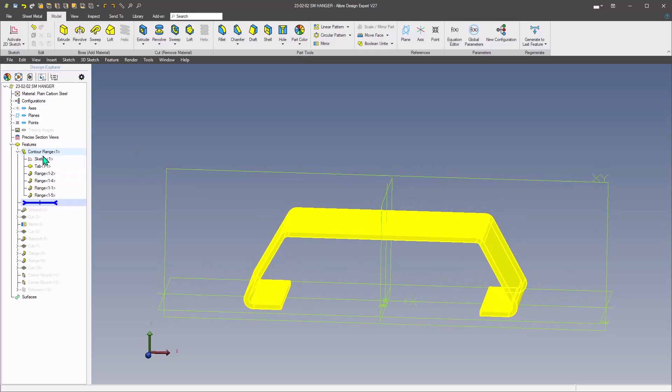Okay, so here's the part that I ended up with. Let me just roll this back to the beginning, and we'll kick it off with the first step that I did, was create a sketch so that I ended up with the requisite 170 millimeters along the top at the apex of this bend.

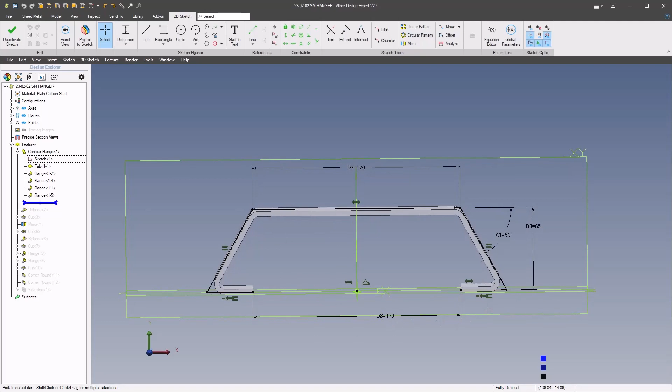Then I put in a 60-degree flange sketch on each side, and I made those two equal. And then the bottom flanges, I made them coincident with the origin and 170 millimeters between, and put in equal constraints between those two. And I've got a dimension at 65 millimeters high, which is the required 65 millimeters height that we need here.

And then with that, I created a contour flange, and I extruded that to the total width of 112.52.

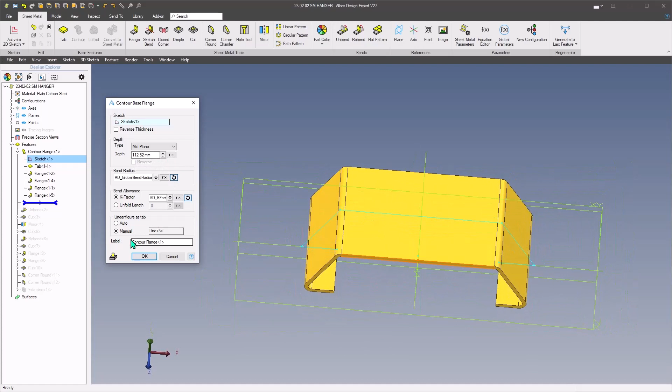Now, one thing I'll point out here is that when you're using the contour base flange, the linear figure as tab is usually set to auto, and I usually leave it set there, but when you go to get the flat pattern, it can give you some odd results.

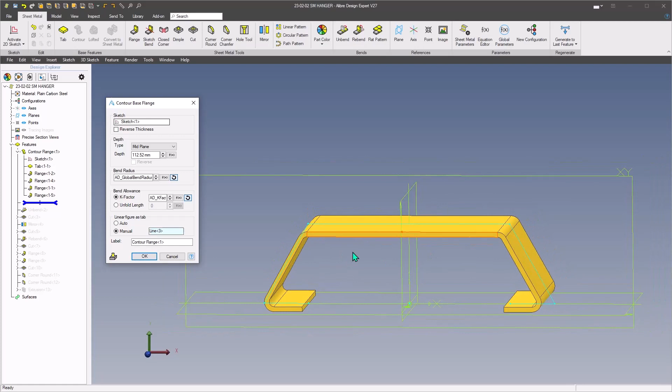So what you want to do is select manual, click in this box, and then select a horizontal line, and that will give you a part that will flatten parallel to the XY plane, and it won't be skewed off at some weird angle. We'll cover that later in the video.

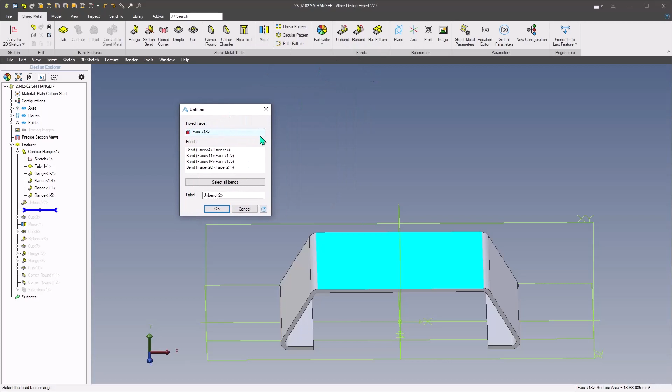So with that said, I've got this basic shape. First thing I did is I went in and did an unbend, and basically you go to unbend, and I just click on my top face here as the fixed face, and then hit select all bends so that everything would unfold. And the next step was putting in this sketch so that I could get the 26-degree cut or slope on the end faces.

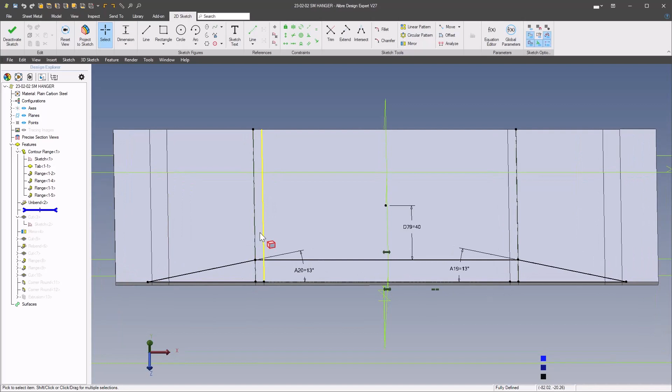So my sketch goes from this tangent, this edge of the bend line to this line here. Those are going to be the tangent points of the bend to the side faces. And then I dimension that 40 millimeters off the center, or off the origin.

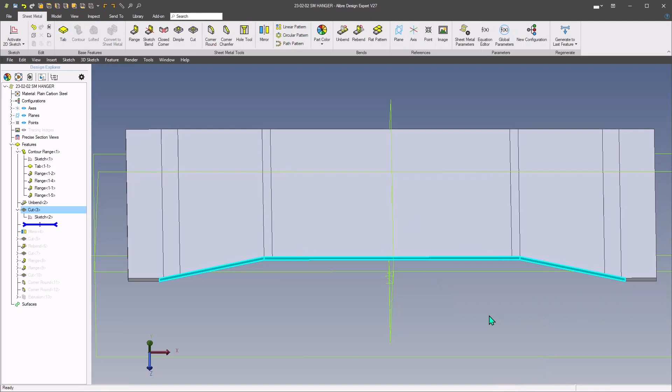And then at 13 degrees, I just extended that out to where it came to the edge, and then put a line across there. So now that notch cuts off that part, and mirror it. Now we end up with an 80 millimeter wide tab in the middle, and then 26 degrees on their side faces. So we measure between our side faces.

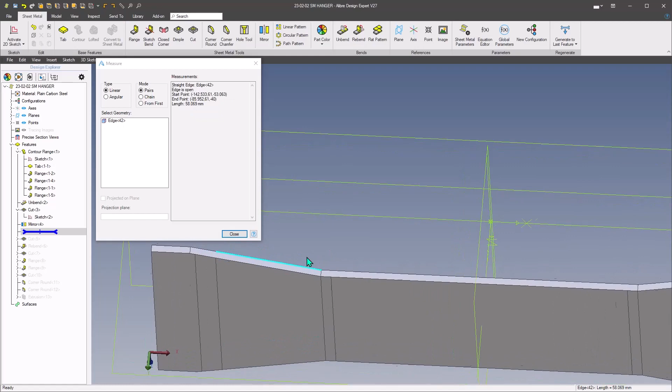If I can get the face here and the face here, go to angular, we've got 26 degrees, which is the required angle that he needs there.

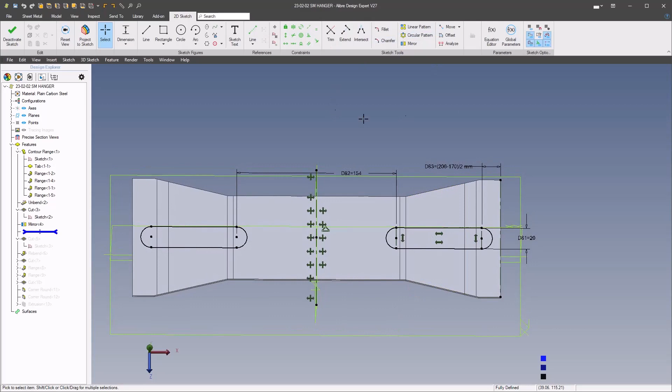Then we go to put in our cut, and this is where I know on his video he was saying this was kind of tricky, but anyone that understands the reason why they put unbend and rebend in sheet metal tools understands how to use this.

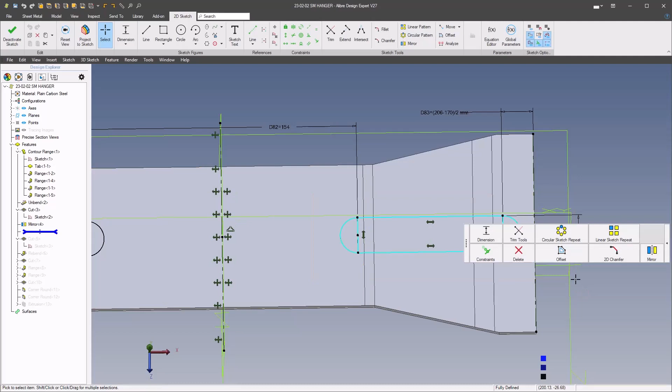So what I did is I created this as a rectangle on this side, and I converted these two end lines to reference figures, and then I sketched in some center point arcs to complete this off as a full dimension arc. Then just drew a rectangle around it, and I mirrored that to the opposite side, and then I applied my 154 dimension between those two.

So I've got 154 on the top surface. To get the right dimension on the bottom...

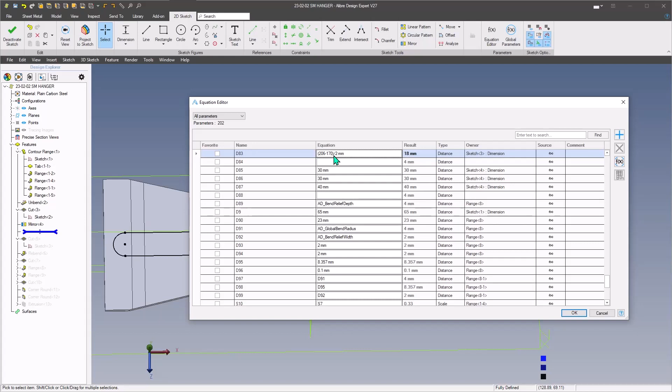What I did is I open up my equation editor, and then I put in open parentheses, my 206 is the dimension that I need, and I subtracted the 170 dimension, which is the dimension between the ends of the flanges, close parentheses, and divide that by 2, and it gives me 18 millimeters, which is the distance from the center of this radius slot to the edge of that panel.

And then it was a matter of cutting that through.

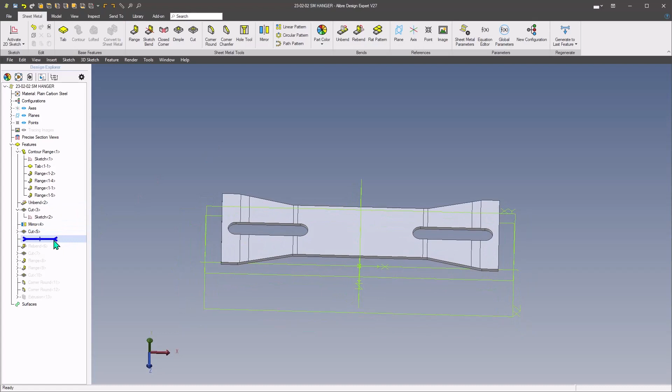The next step is to do a rebend, which is basically just select the rebend tool and click on select all unbent bends, and it folds the part back up again.

And if we measure between these two slots here on the bottom end, we end up with our 206 as the drawing requires.

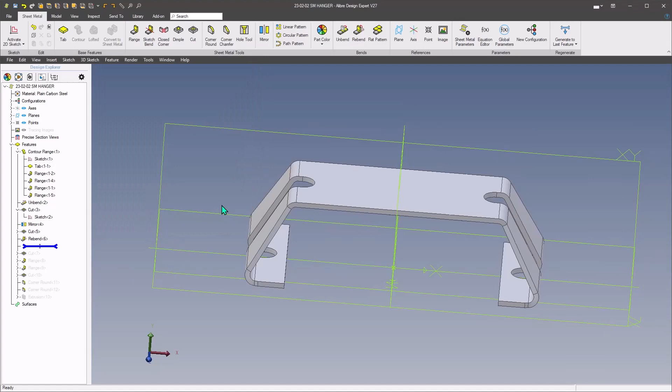Next thing I did was cut these two holes in the top for the top flanges, and again I used a mirrored sketch. I put a 30 millimeter square in here, and then I centered this on the origin using constraints, going to midpoint.

It's like these 2 points and then the origin, thanks to Ex Machina for that tip. And then I mirrored that to the other side, and I was able to dimension 40 millimeters between the two edges, and they stay centered on the part.

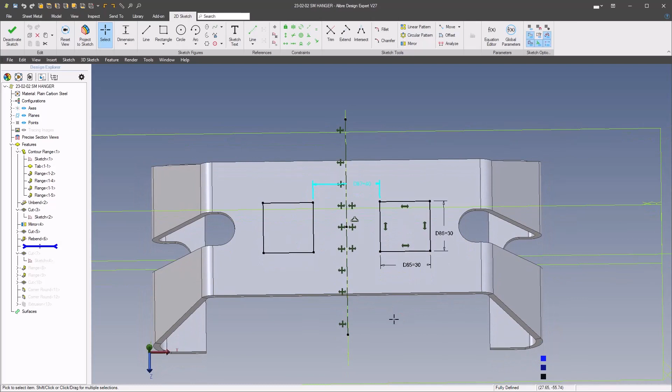And then it's a matter of doing the cut to thickness on there, and then we're done with the holes.

Then for these flanges, basically I selected the two inside edges, set my flange alignment to adjacent, and since the dimension here we're at 65 on the total height, 88 to the top of the flange from the bottom, leaves us a 23 millimeter flange from this top surface.

So using inside dimension, I set it at 23 millimeters, and then on my offsets I put 2 millimeters in each one. That gives me the 2 millimeter gap on each side, and it's set to 90 degrees, and that takes care of that flange.

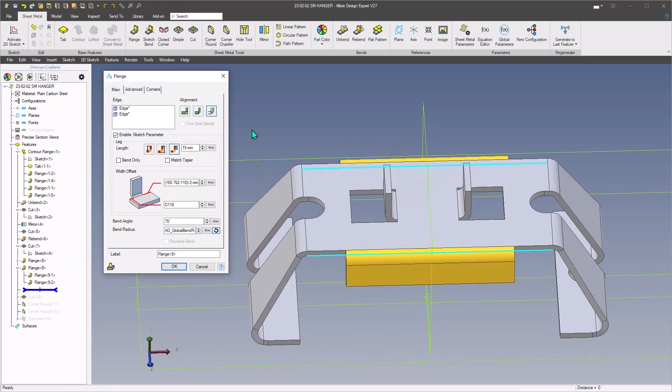Then for these flanges, again, before I let me back up here. Before I put these flanges on, I selected the edge here and got the length at 160.762, because I'm going to use that value to calculate the length of these tabs or flanges.

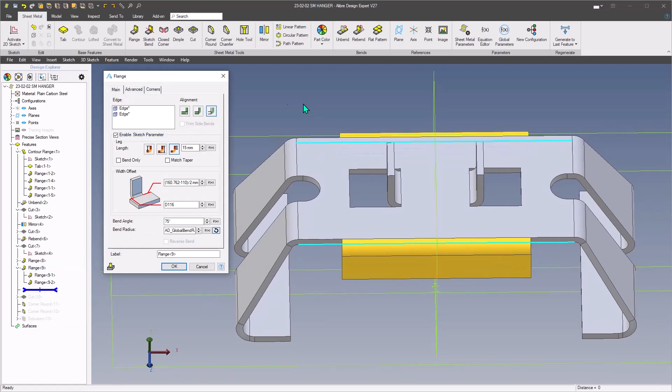So what I did here, again, I'm going to do a bend that's adjacent so that the bend is outside the material.

Now here we're looking for the tab length at 15 millimeters, and for the length offset, again going to the equation editor, I've got my open parentheses and 160.762 minus the 110 flange length, close parentheses, and divide that by 2, gives me the 25.381 offset dimension.

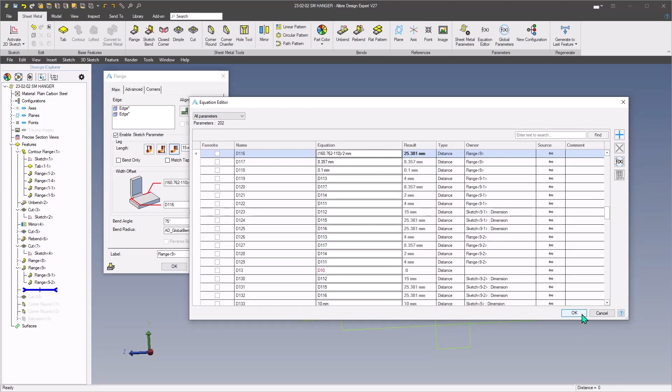Then I made this dimension equal to this one just by keying in its label, D116, into this box, and I've got a flange that's centered on the panel, and that is in fact 110 millimeters long.

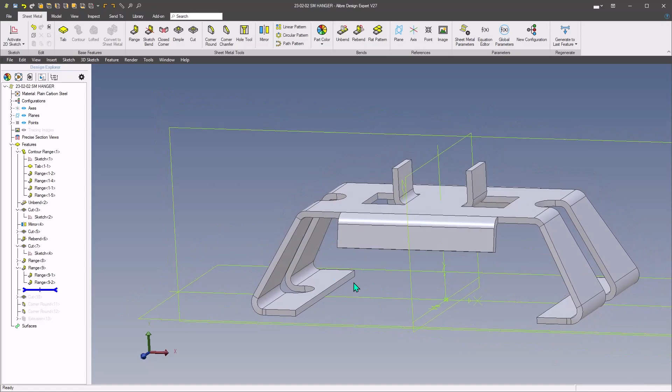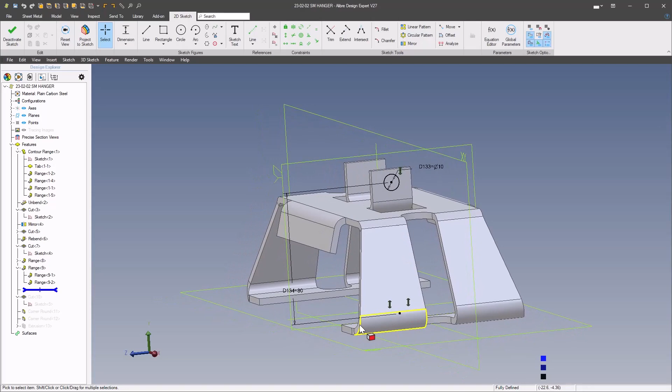The final cut that we did here was a 10 millimeter diameter hole through the top flanges. That's just a 10 millimeter circle drawn on this face with a vertical constraint between its center point and the origin, dimensioned at 80 millimeters off the origin, and cut through all.

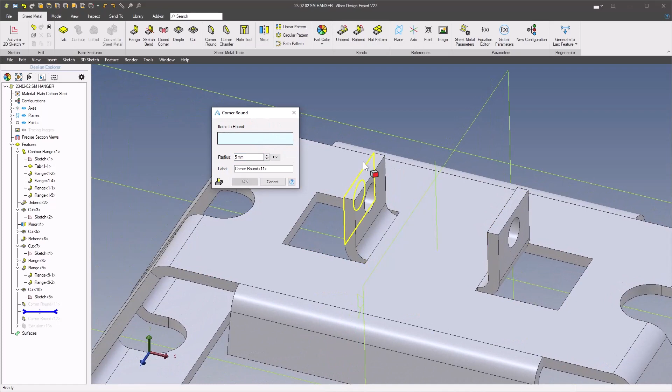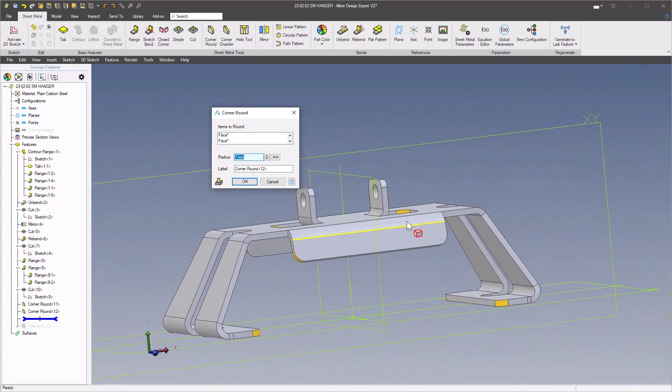Then it's just a matter of throwing in some corner flanges, or corner rounds. Notice it says faces and not edges here, so if you want to select all the edges on this tab, you just grab an edge or a face, and it grabs all those edges and applies a radius to them. On the bottom, again, all the remaining edges get a 7 millimeter radius. So it's a matter of selecting all these different edges to get the radius, and in some cases you can select just the panel itself and it'll radius the corners for you.

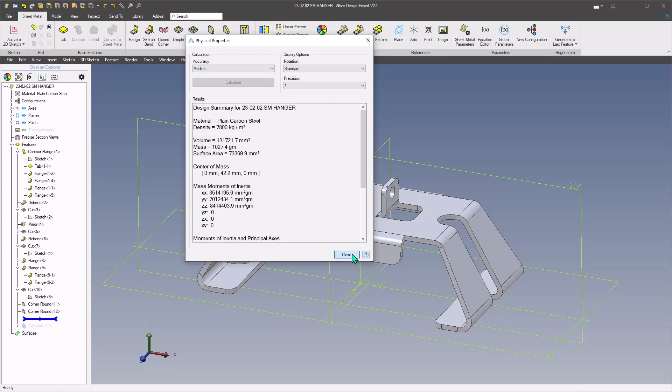So that was kind of the quick and dirty on how this part got made, and I ended up with a total mass of 1027.4, which is 0.6 grams off of his requisite 1028. So we're well within tolerance on here.

So what I want to do is show a couple of things that I noticed differences between the way I created this and the way Tony was showing on his tutorial.

Okay, so let me start a new part here, and I'll just set the sheet metal thickness to 4 millimeters, and we'll make the bend radius equal to thickness, and okay that, and then we'll just create a sketch here on this XY plane. Actually, I'm only going to create half of the part to illustrate the major differences that I found here.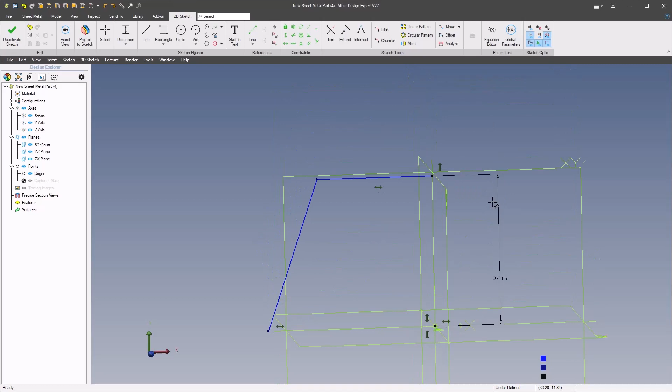So I want a vertical constraint between this endpoint and the origin, and then a horizontal constraint between the origin and the end of this line, and we'll dimension this to 65. This is going to be at an angle between these two at 60, and the length on this line here is 170 divided by 2.

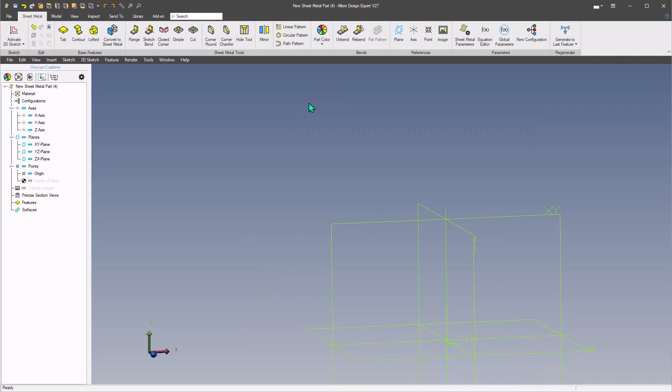Okay, and then we'll select our contour flange tool, and we'll change our depth to mid plane and our width to 80 millimeters, and then we want to reverse the thickness because we want the sketch line to be on the outside, so we capture the 65 millimeter height and the length to this intersection or this apex.

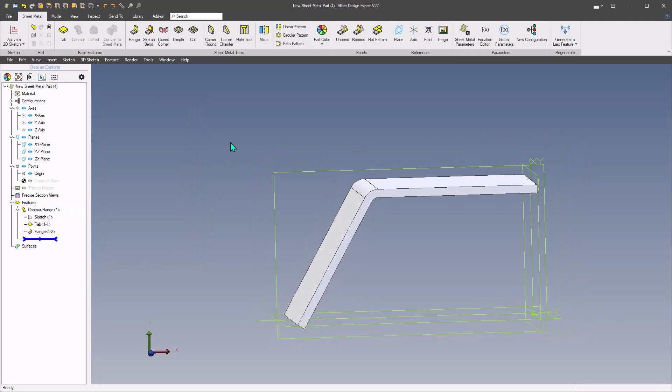Okay, so now let me okay this, and here's one thing that I want to point out. Since I started this sketch with a horizontal line, and it says the figure tab is auto, if I switch to manual, it's saying that it's going to pick up line 1, which is this horizontal line, to create the flat pattern. So when you do a flat pattern, it's just going to align that nicely with the XY plane.

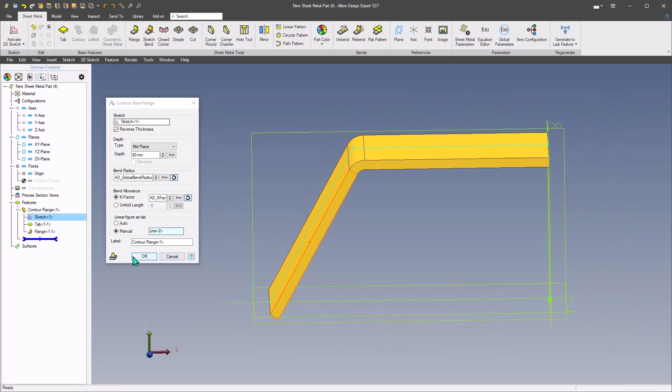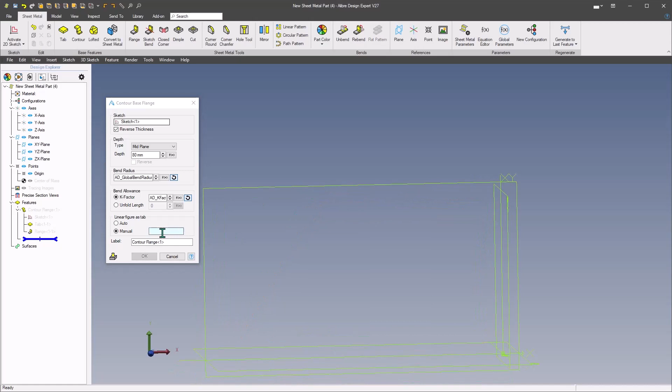If I had this pick this other line here, it's line 2, and go to flat pattern, see how it's skewed now because it's got this line at an angle, and it kind of just throws it up there. I don't know, it seems arbitrary, but I imagine there's some reason for it. So let me switch this back to line 1, contour flange, edit, select line 1, okay, and flat pattern looks good.

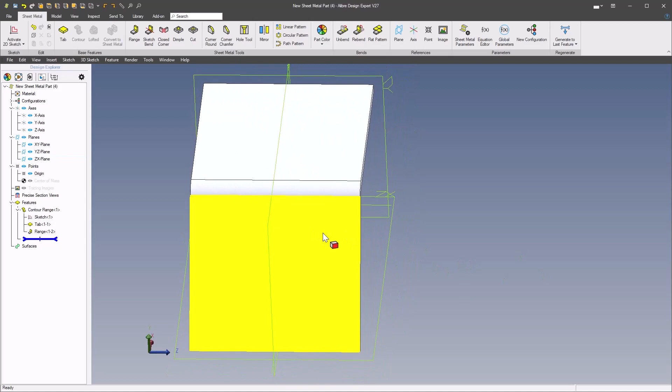So now here we have our width at 80 millimeters, and what Tony was saying in his tutorial, he was actually creating a sketch on this panel, and we'll just convert this to geometry, and then we'll come in here and draw a couple of lines. Didn't get my lines here, maintain, and select OK.

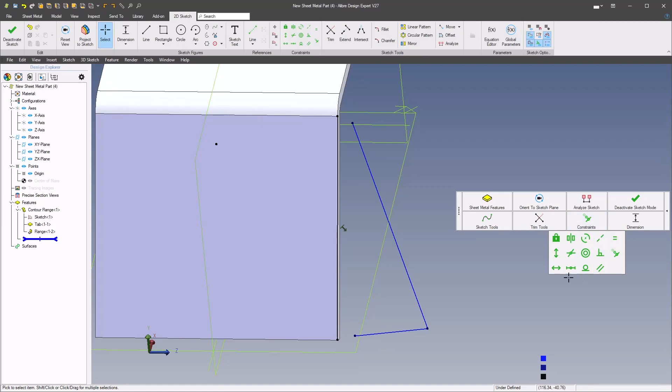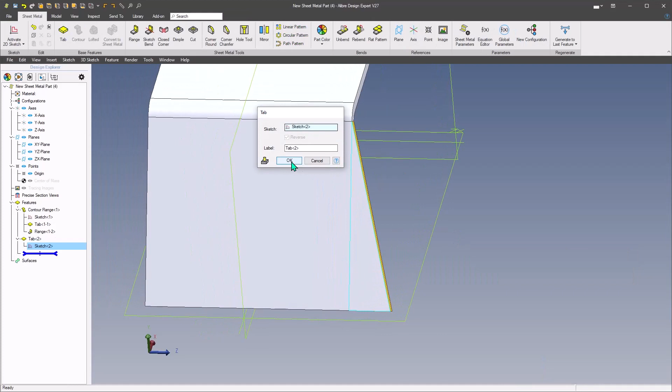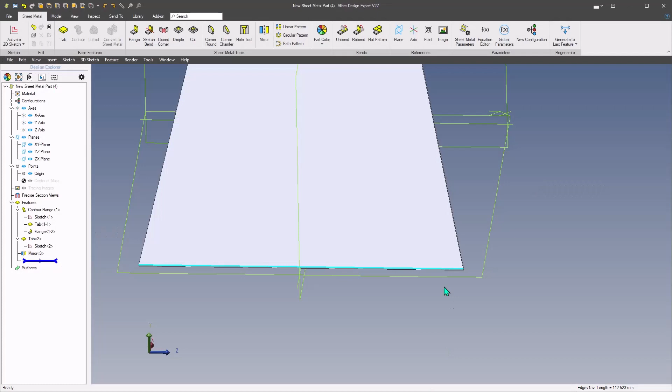Now we'll have a coincident from this point to this point, and from this point to that point. We'll make this horizontal, and this will dimension at 13 degrees, and create a tab on there, and then we'll mirror this tab about the center plane. Here we select our edge there, and we get a length of 112.523, which is what he was showing on his drawing at 112.52 as the width on that. So I'm assuming that his method gave him that length, and that's what he stuck with on the model.

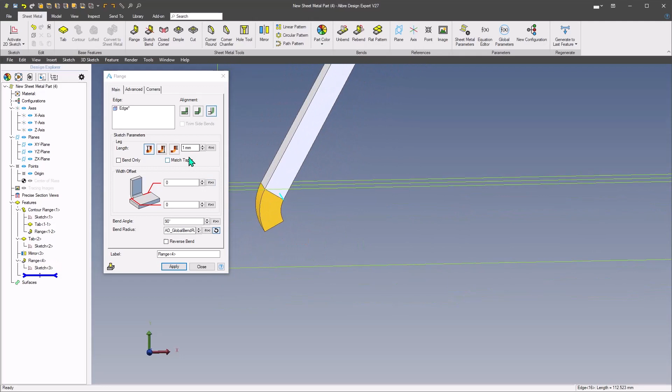So now we need to add a flange, return flange down here. If we come up here and select our edge flange, and grab this line here, I'm not sure what the length is going to be, but we'll say 45, and then we need an angle, change that to 120. But now we need this panel, this flange, to be up here on the line with the origin, so we need to change the position of the alignment.

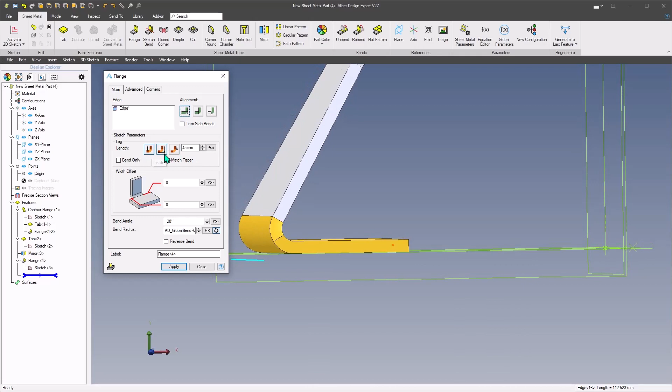So if we change this to outside, that's still not there. If we go to inside, then we get it lined up with the origin. The leg length really doesn't matter, because I'm going to trim this back to the 85 from the middle, so that it lines up with the 170 divided by 2 on the top there. So we'll apply this and close.

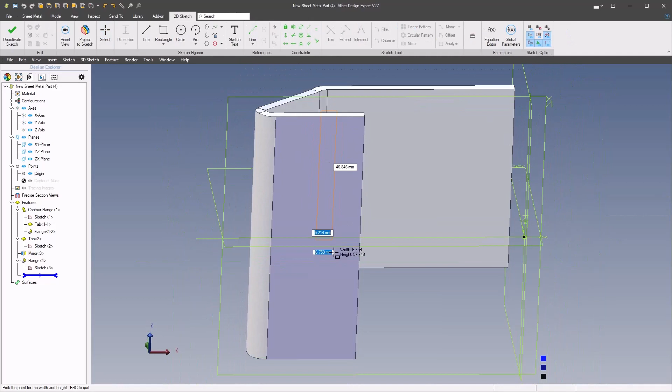On here we'll activate a sketch, do a rectangle, and we'll just throw a quick dimension on here, 170 divided by 2, and we'll do a cut to thickness. So now we have that length, and we have our height from this panel to this panel. We have our delta Y at 65 millimeters, which is what we wanted.

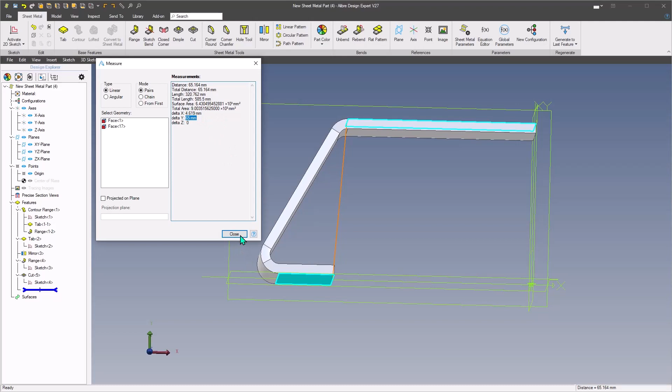Now here's the kicker, is that we measure the length of this line, we're at 108.698, or round it off 108.7, which when you look at his drawing, 112.52 plus or minus 1, so the shortest we can be is 111.52. So using his method is going to put this out of tolerance for length.

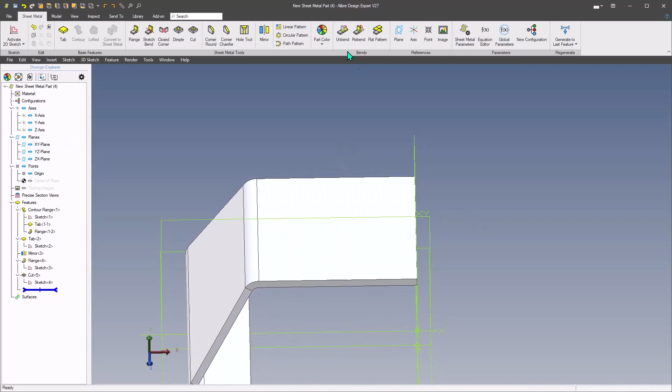The other thing I wanted to show is that his part here, he's got 30 millimeter rectangle or hole squares cut out here, and if we come in here and try to use our sketch bend tool, we're going to have a problem. So if we do a sketch here, say 30 by 30, and then we'll use our midpoint constraints between point and points of those lines and the origin to center that, and then we'll just dimension this to 20.

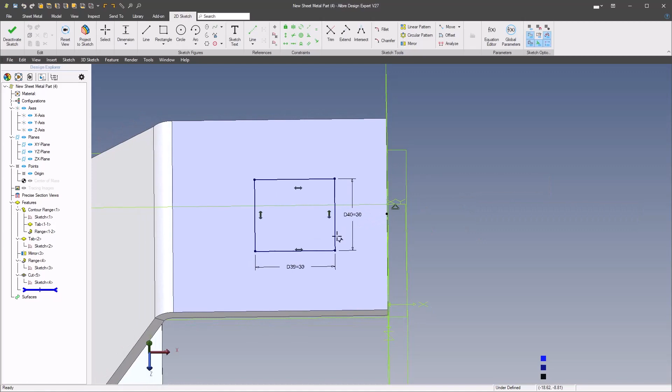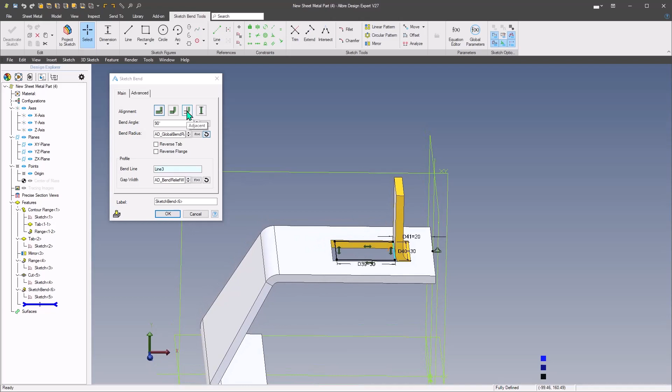And go to sheet metal and grab our sketch bend tool, click in the bend line box, and then we'll select our edge line over on this side. And now we want to have our flange adjacent, so that it's adjacent to this 20mm line. And then our gap is going to be 2mm.

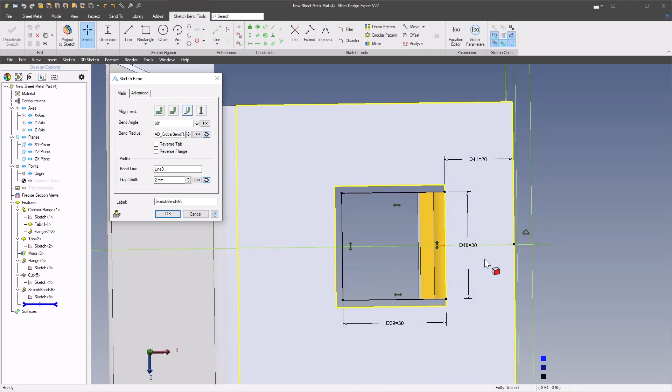So if you notice what's going on here, when you use the sketch bend, the sketch is actually defining the size and shape of the tab or flange that you're bending. The offset width, or the gap width, is going to define the size of the cutout. So if we need this cutout to be 30mm, then we need to reduce the flange width by 4. So this has to be 26.

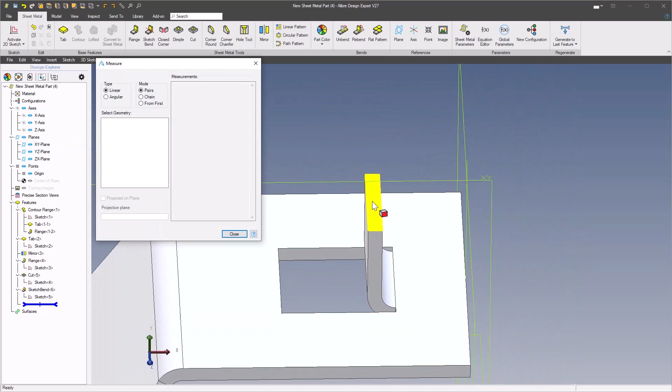So let me come in here. We'll change this to 26. And now we have a length here of 30mm. Now the flange length or height here, we need this to be 23.

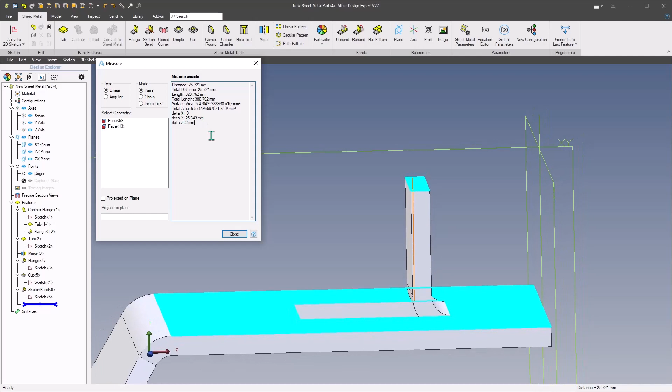And our delta Y is 25.643, and we need that to be 23, so we need to subtract 2.643 off of this flange. Minus 2.643, and let's see what happens here.

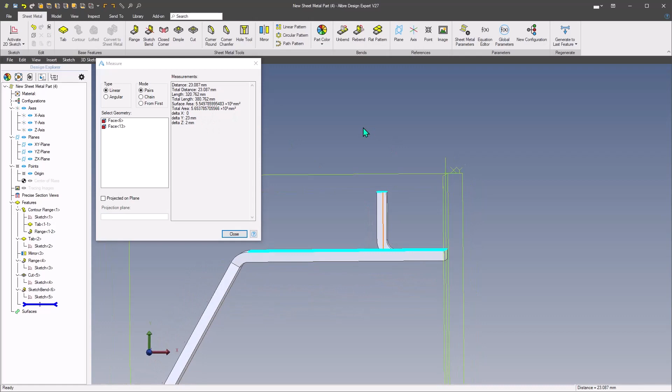We'll measure it from here to here, and we've got 23, and from this point to this plane is 88, which is what the drawing calls for.

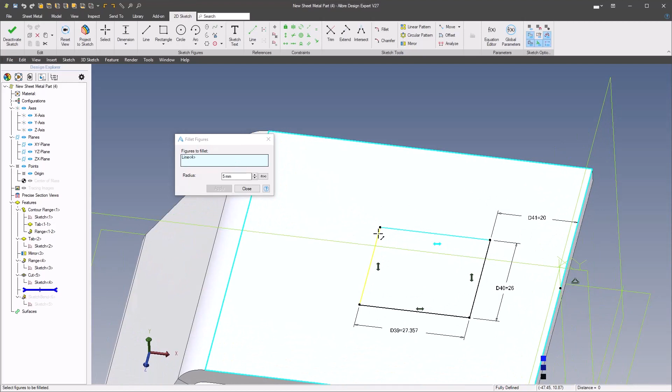And then to make it even simpler, let's edit this sketch, and we'll put in some 5mm fillets on this sketch rectangle, or well, it's rectangle now because it's not square anymore. And then we end up with 5mm fillets on the tab and 7 on the cutout.

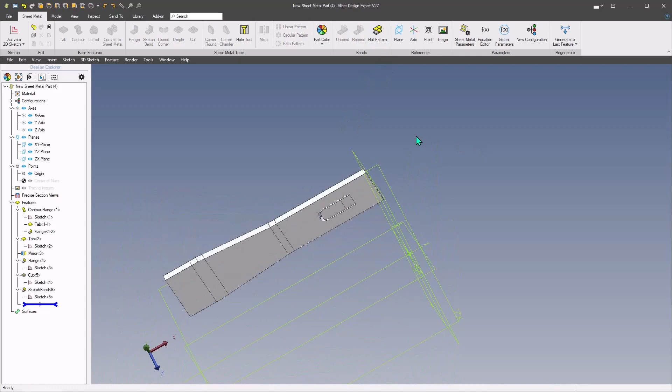And when you flatten this—oh, that was weird. So when you flatten this, we end up with 2mm gap on the sides, just like we keyed in, and 2mm on the end, because the sketch bend is going to treat that 2mm all the way around.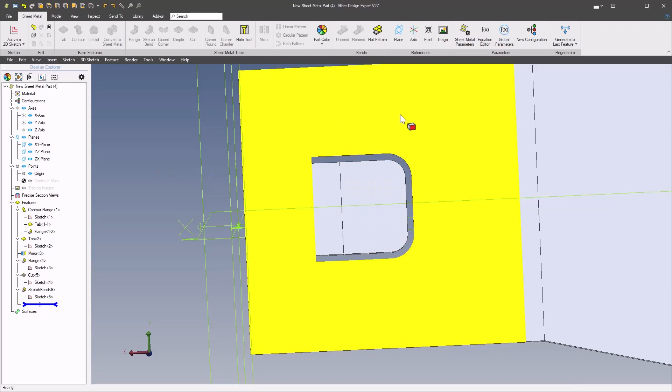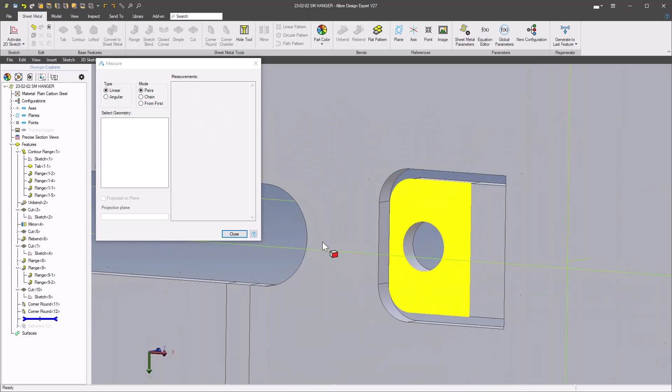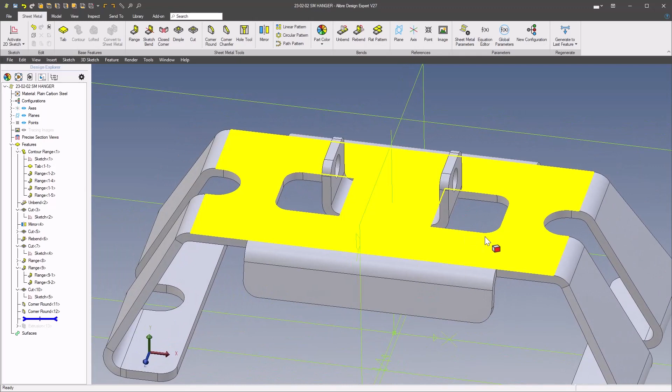But if you look on my original part, when I do a flat pattern here, and I measure that cutout, I've got 2mm on the sides, but on the ends I got 2.643, which tells me that in his initial design he did not design this as a sketch bend. It was set up as individual features of a square cutout with individual flanges added to the part.

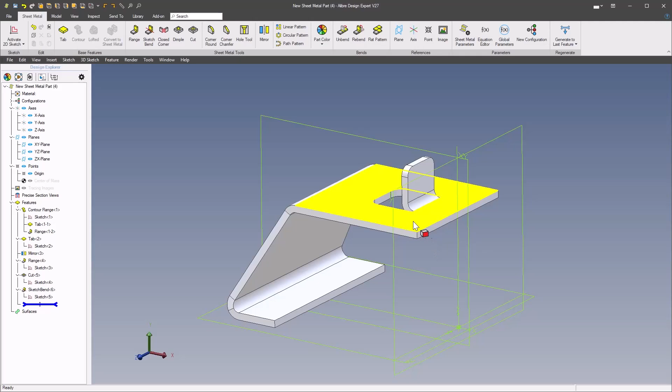So you cannot use a sketch bend to create this feature on this part. Anyway, those are the couple of things I wanted to point out, differences between his tutorial and how you can create this part in Alibre Sheet Metal.